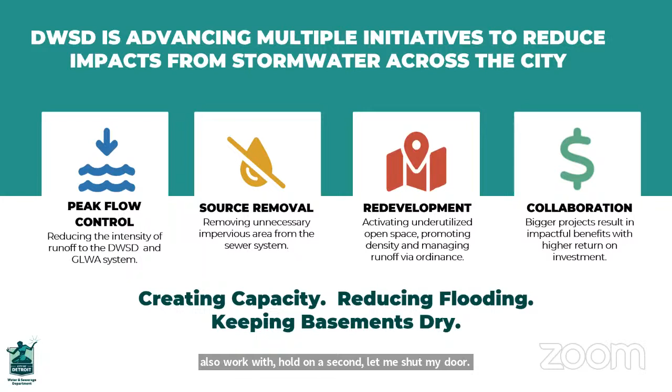We also work with—hold on a second, let me shut my door. My apologies. We work with redevelopment to make sure they manage the stormwater where it falls.

We also collaborate with other entities such as MDOT, Bedrock, and our surrounding communities to get the most bang for our buck on stormwater management.

So let me talk about stormwater regulations. Prior to 2018, we did not have any restrictions on development managing their stormwater, so they just let it flow right into our combined sewer system. Then we passed the ordinance, and now we have over 100 projects across the city that have to manage their stormwater, and that's over 600 acres of land.

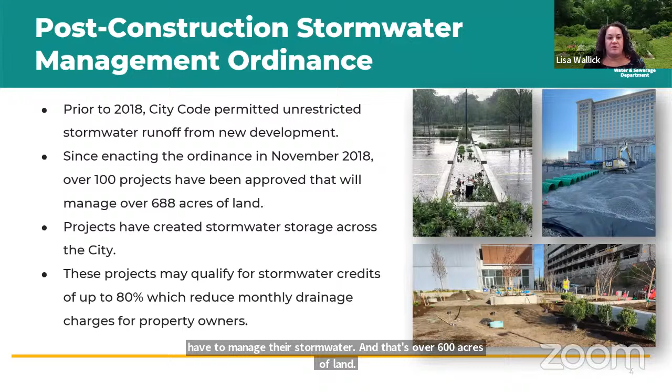These projects qualify for stormwater credit once they're installed. This says 104, but we know we have more than that. During a storm event, they hold back over 50 million gallons of stormwater, and at the same time these projects reduce, eliminate, or directly discharge over 2.8 million gallons to receiving waterways.

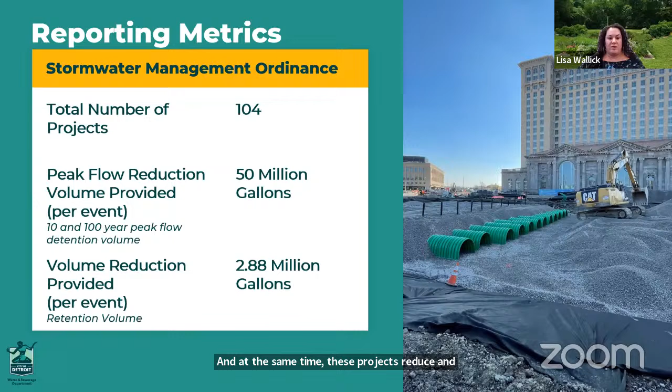We also have the municipal separate storm sewer system called an MS4 permit with EGLE. MS4 is where the catch basins are piped directly to receiving waterways, so they do not connect to the combined sewer system—they go directly to waterways, which requires us to comply with a permit in order to allow that to happen.

So we have to submit biennial reports to EGLE regarding our program status. We have to train our staff so they know what should or should not be going into that catch basin. We have to regularly inspect and clean the catch basins, which our M&R team does with us. We also have to do water discharge quality testing to make sure there's no E. coli, bacteria, or anything else coming into that pipe headed towards the water body, ensuring nobody illegally connected. So we have to do annual testing.

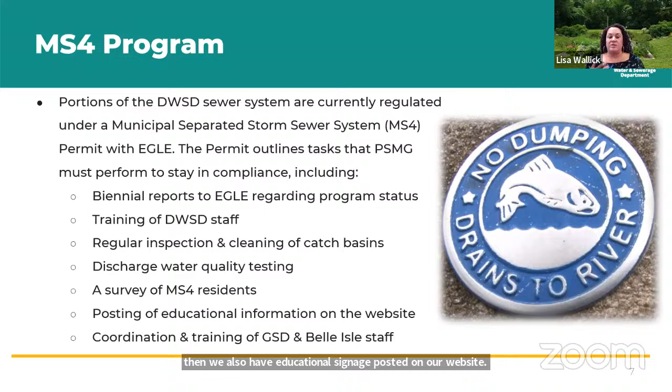We also have to work with residents within areas that have these catch basins, survey them, and let them know what they should and should not be doing near catch basins that directly discharge to receiving waterways. We also have educational signage posted on our website, and we train the GSD and Belle Isle staff, as most of our MS4 is either on Belle Isle or in parks.

So then we also have projects that DWSD completes. These are our own GSI projects. We have constructed 19 to date that manage stormwater, mostly in the Upper Rouge tributary area of the city, which is the northwest side of the city. They manage more than 53 million gallons of water annually, reducing peak flow going into the system, and they usually include native landscape to help beautify streets and parks.

Most of them are in parks and city public facilities. Now that we've gotten into bigger projects, we coordinate with our water and sewer engineering teams to ensure that when we go into a neighborhood we're assessing their water and sewer needs as well. We don't want to go in and put in a bunch of storm sewer to convey stormwater, and then 2 years later go in and rip up the neighborhood and put in a bunch of water mains. So we coordinate so that when we go into a neighborhood for a very large project, we make sure we're only disturbing it once.

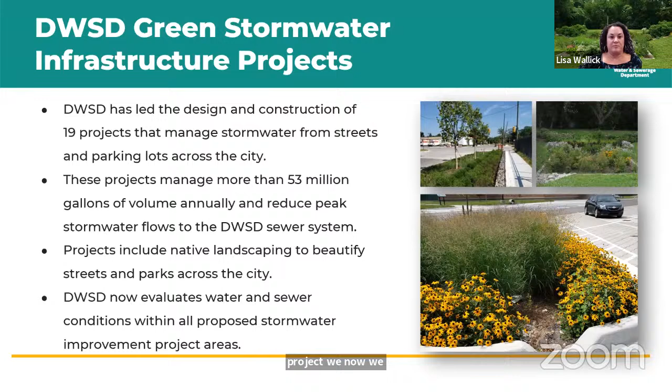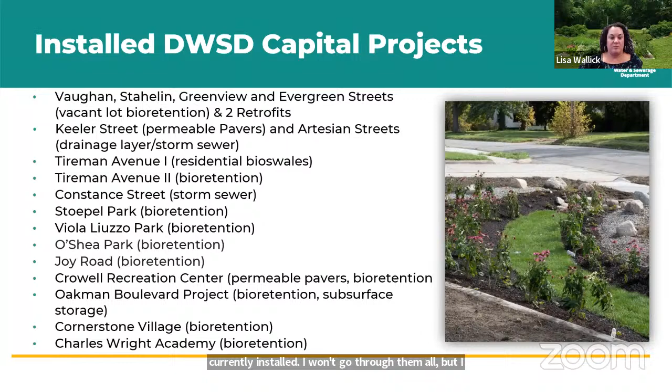So this is a list of those 19 projects currently installed. I won't go through them all, but I think they'll be in the presentation you receive. That's what's in the ground now. It cost $13.9 million to construct those 19 practices. They hold back 2.2 million gallons of stormwater per event, and they have a peak flow reduction annually of 53 million gallons.

So we do have some projects under construction that are not included in that list. Far West is our first, biggest project. That cost $32 million, and it was almost fully funded by the Evergreen Farmington capacity swap, where they needed to get water into the system and we were getting all this water out of it. So with coordination with GLWA and EGLE, we were able to do a capacity swap and have them fund this project, where we are managing stormwater runoff from over 200 acres. That's a 2.5 million gallon peak flow reduction, and this project removes over 100 million gallons from the system annually, really freeing up capacity in that combined sewer system.

In this case, we're in Rouge Park, which is going to be a beautiful amenity for the park to have this big piece of green infrastructure.

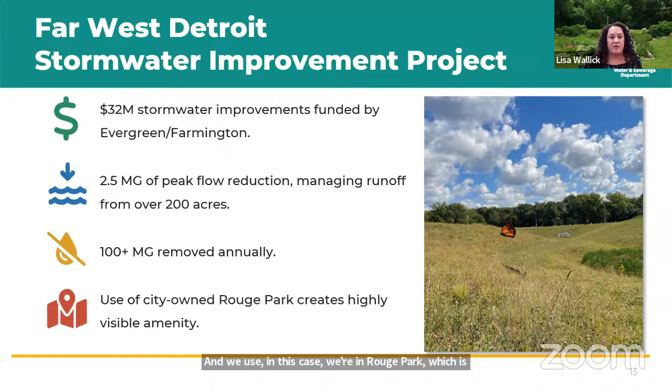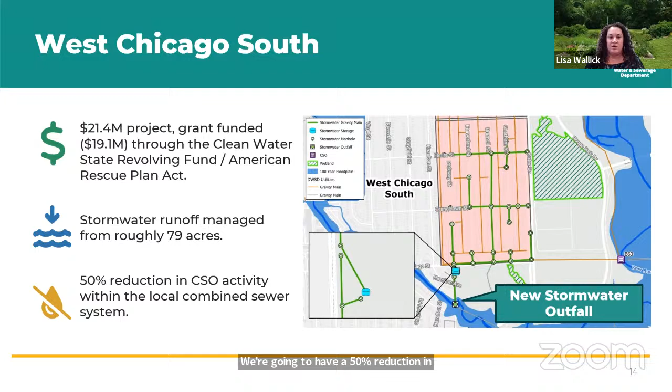A project that also just kicked off was West Chicago South, a $21.4 million project. We have grant funding in the amount of $19.1 million. We are going to manage runoff from 79 acres. We're going to put in a new stormwater outfall that discharges at the Ashcroft Drain, which will help improve water quality there, and we're going to have a 50% reduction in CSO activity as a result of this project.

So we're getting the stormwater out and also helping to meet regulatory requirements. Blackstone has also kicked off. This is where we're investing $1.4 million. We have $300,000 in grant funds for this project as well, and we're reducing the peak flow for 4.34 acres. We're going to remove over 500,000 gallons of stormwater annually from the system.

So here we are, it's the first time we're going to try removing a street. We're removing a portion of Blackstone between Keeler and Midland, and we're going to install over 200 trees to manage stormwater and create like a stormwater park there. So this will be our first time experiencing this, and it's exciting. The residents there are excited about that too.

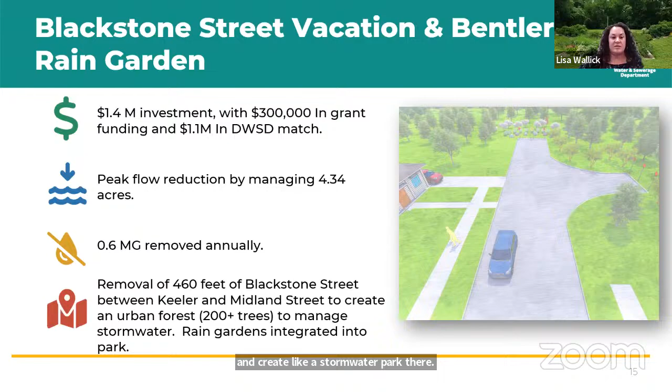We have projects in design. This project, the Detroit and Centerline Collaboration Project, just went out to bid. This is where we worked with GLWA, EGLE, and Centerline, as Centerline needed to get a small increment of flow into our system, and they were willing to fund a project for DWSD to do to get a lot of flow out of the system.

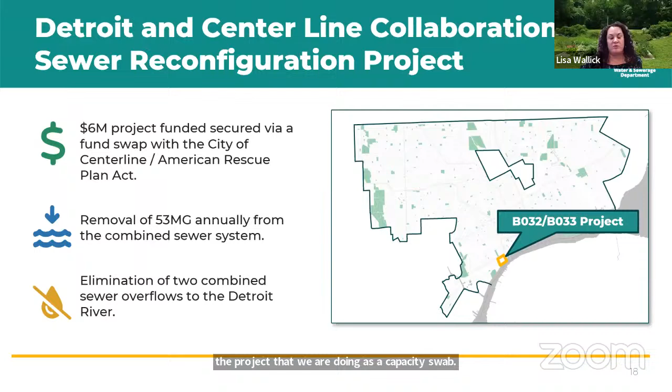So in this case, we received $6 million from the city of Centerline through their American Rescue ARPA dollars. We are going to remove 53 million gallons of stormwater annually from the combined sewer system through this project, which we are doing as a capacity swap. This will eliminate 2 combined sewer overflows from discharging in the future. The area is a 55-acre drainage area, and you can see at the bottom of the screen B32 and B33. Both of those will, in the future, discharge stormwater only and no longer be connected to the combined sewer system, so we're really creating capacity there and managing a lot of stormwater.

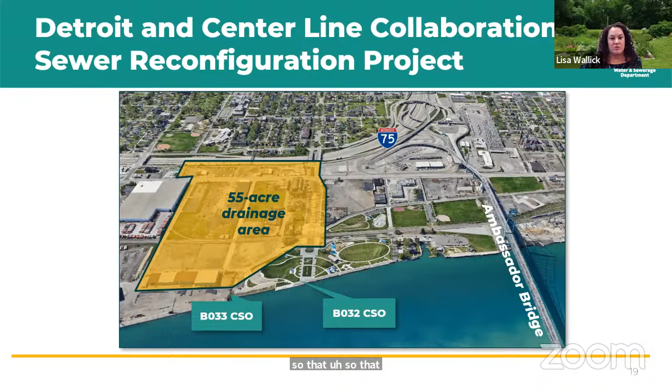We also have shovel-ready projects. We have over $60 million in planned stormwater management improvements for West Chicago and Schoolcraft. And we know there's a lot of funding out there, so we went ahead and moved forward with these projects through design.

They are to remove stormwater from the system and get it to the Rouge River. It's a combination of gray and green infrastructure to maximize performance. We are seeking funding through the state's Michigan Clean Water Revolving Fund, and anywhere else we can. We're looking for money, and if anybody has any, we'll take it.

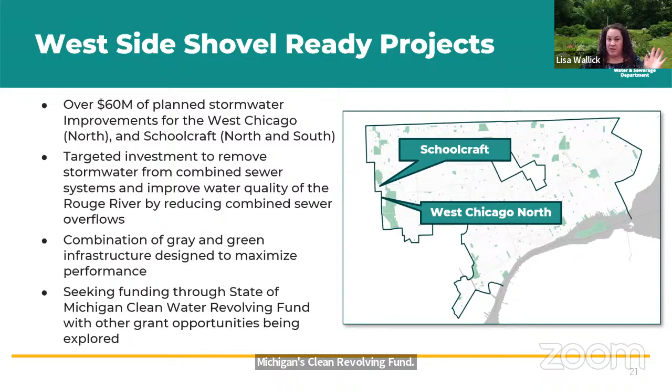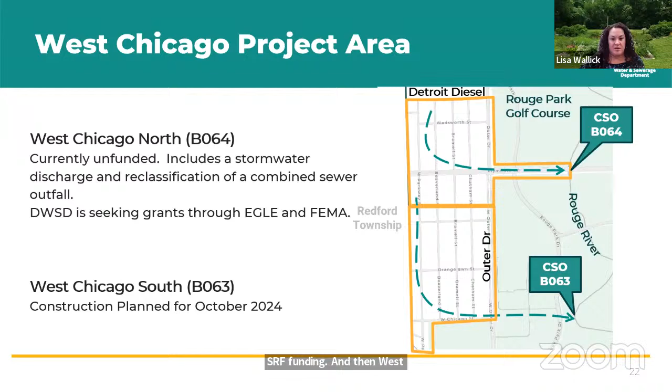Schoolcraft North is currently unfunded and we're seeking funds through EGLE and anything else that comes up that we think might work. Same with Schoolcraft South, which will also include a new stormwater discharge to the Rouge River.

The Fenkell stormwater projects are shovel ready and funded. We have $1.3 million in grant funds secured to install approximately 20 bioretention practices, and all the green dots on the map show the locations. These practices will manage stormwater runoff from roughly 50 acres and have a 9 million gallon peak flow reduction during a storm event.

These gave us a lot of information on groundwater table and infiltration. We're hoping that these all connect to a larger project that's in the works. So this was a great grant-funded initiative, and it'll help provide an amenity to hundreds of homes.

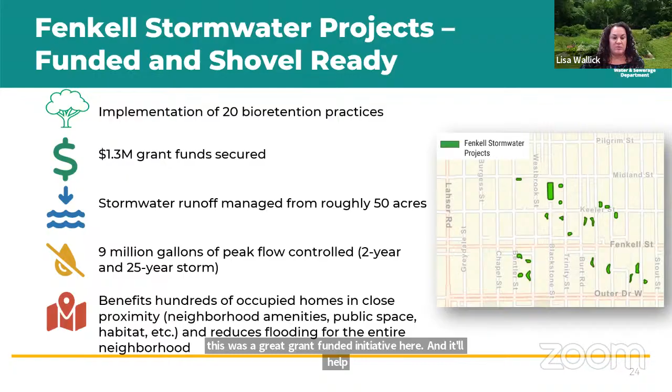So we have projects in planning. The East Side Stormwater Relief Study - this project is fully funded by grant dollars. We got creative: we received an EGLE grant for $480,000, and used a NFWF grant as the match money. So this project requires no ratepayer dollars.

What we're going to do is try and find a way to study the area - a study to see if we can get the stormwater from these 5 neighborhoods into a collection system and into possibly some sort of nature-based solution that could treat the stormwater and then pump it to Fox Creek, where we could improve the water quality in Fox Creek as an added benefit.

This area was chosen for the study as it has long lengths of storm sewer before it attaches to the combined sewer. So if we can catch those existing storm sewers and reroute them, that would be a great benefit to the east side.

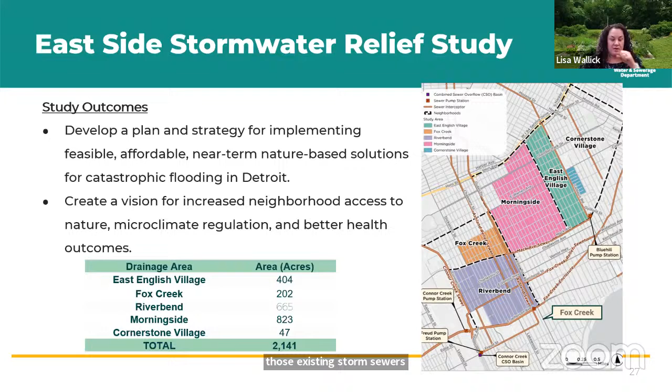The objectives are, same as most of our other projects: we want to keep basements dry, reduce street flooding. We don't want the risks associated with flooding in this area. We want to improve our infrastructure resiliency and be ready for climate change and the shift in weather patterns we're having. And Fox Creek could really use some improved water quality - that'd be a great addition if the study proves we can make that happen.

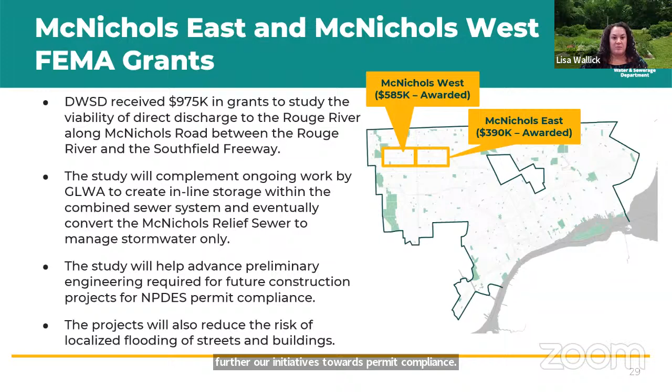McNichols East and McNichols West - we have almost $1 million in grant funding to study these 2 areas to see if we can get the stormwater out of the system and to the Rouge River. This study is also planned to complement work going on by GLWA, where they're trying to create or install inline storage. We also want to convert the McNichols relief sewer to stormwater only. All these things will be coordinated with GLWA as well to see how best we could get the stormwater in this area to the rivers, especially since this is a highly active CSO area. That will help further our initiatives towards permit compliance, and again, reduce the risk of flooding in the area to buildings, streets, homes, etc.

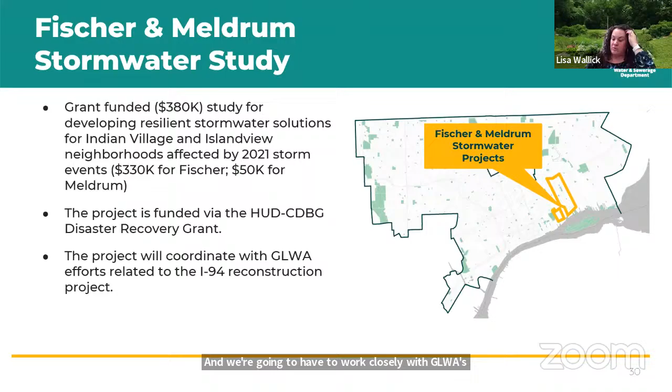Fischer Meldrum - we received grant funding from the HUD CDBG Disaster Recovery Grant. We are going to study the area of Indian Village and Islandview neighborhoods to see if we can find a way to convey the stormwater to the Detroit River. We'll have to work closely with GLWA's efforts in this area, as well as the I-94 reconstruction project. So in a nutshell, our projects in planning right now are shown in the lighter green across the screen, and then we have the darker projects - the darker green are those that are designed.

Three of them are actually funded, and the other two are awaiting funds. And then we have our construction projects that are ongoing.

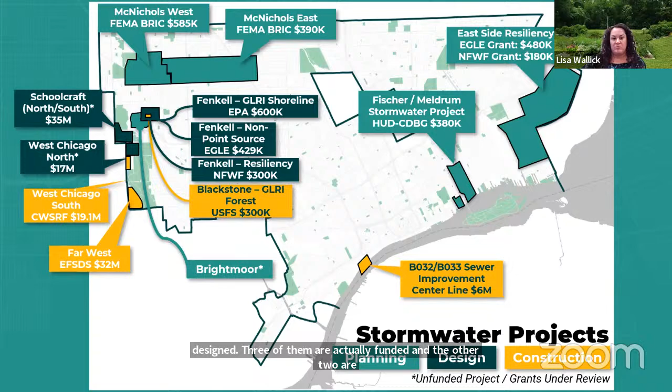So, stormwater collaboration. I talked earlier about how collaborating can lead to better stormwater management. With Gordie Howe, we worked closely with them, and we were able to have them convey all their stormwater to ponds on site that then discharge to the Detroit River. That was a $30 million investment by Gordie Howe.

We're working with the 375 team right now, and as they bring that freeway up to grade as a boulevard, they are going to install a stormwater-only discharge pipe for themselves, as well as one for DWSD. We're getting a 4-foot stormwater discharge pipe that will take the excess property's drainage that is going back to the city. We'll get the drainage from that and attach it to the 4-footer. That's over a $35 million investment by MDOT in that area.

Then you have the I-94 reconstruction, which is over $700 million invested in stormwater management, where they're going to put in a tunnel to get the water from the freeway to the Detroit River. M39 is currently under a study to see what the options are, and we're assisting with that as well to get the stormwater to the Rouge River.

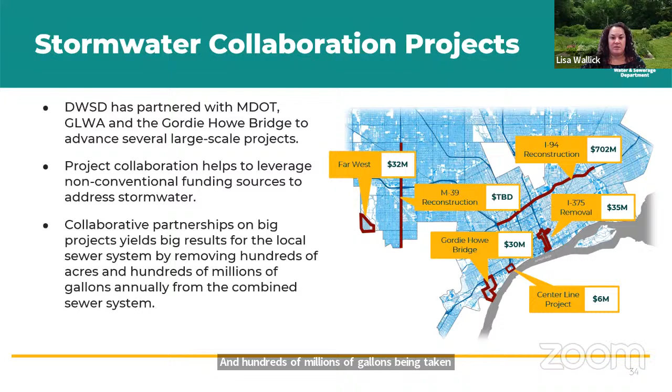So the collaboration with these other entities has led to hundreds of acres being managed and hundreds of millions of gallons being taken off the system. That really creates a lot of capacity in our combined system and helps us become more resilient.

The Stormwater Hub is a website we developed in collaboration with our nonprofit partners and other community groups to promote GSI. It's a website you can go to and interact with, click on resources, and even all the dots on the map tell you what it is, whether it's a rain barrel at somebody's house, a larger development project, or one of our projects, and how much water it manages, etc.

We've gotten compliments from other cities wanting to recreate this, so we've gotten a lot of positive feedback. It's a positive promotion of stormwater management that's owned by DWSD. Public Affairs, our stormwater team, and the IT team all keep the website up and running.

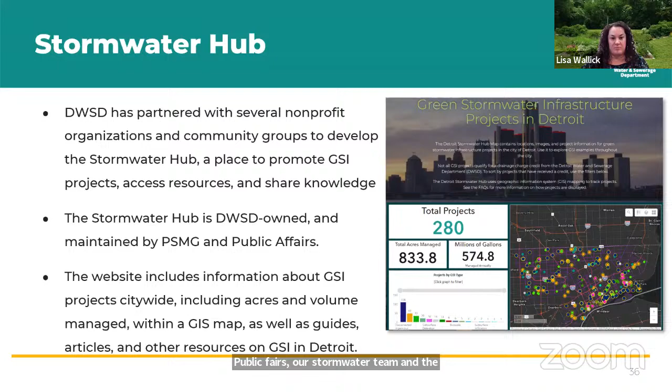The drainage program is where we incentivize owners of existing private property to manage their stormwater and retrofit their site, so they're helping too in this effort. As of the end of fiscal year 24, over 580 million gallons are managed annually through retention, putting it into the ground, or detention, holding it back during the storm. On top of that, there's over 380 million gallons being managed annually through direct discharge.

That's people sending their stormwater directly to the river. It's been highly successful in managing existing sites that didn't have stormwater management previously. In fiscal year 24, we did over 200 property assessments for drainage-related inquiries.

Permitting projects — we have a lot going on in permitting. Some items done in fiscal year 24: we worked with IT to define a business process and procure and install new permit software. That was a big effort. We're trying to upgrade our permitting software.

We held meetings between DWSD groups internally to facilitate timely and collaborative responses to customers, and we've been improving on that regularly. It's a great effort we do here in the permitting section. They also started digitizing historical infrastructure records and analyzing the gaps in the current DWSD GIS database.

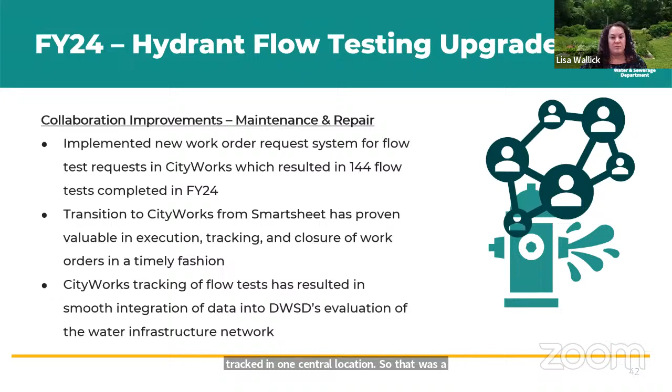We completed a lot of permit reviews and issued a lot of permits in fiscal year 24. BSEED permit reviews were up by 43% - we did 232 of those. We were down a little bit in how many water and sewer permits we reviewed from fiscal year 23, doing 442 of those. Demo clearance was up a little bit - we did 168 demo clearances. We issued 147 hydrant permits, and the sewer repair permit number is up by 27%.

I think that might be good news that people are using the permitting, obtaining permitting instead of illegally trying to correct their sewer issues. So that's good if they're coming to us now. It's progress.

We also train staff on submittals for compliance with the Clean Drinking Water Act 399 and Part 41 wastewater construction permits. EGLE approved 17 of our private development permits in fiscal year 24.

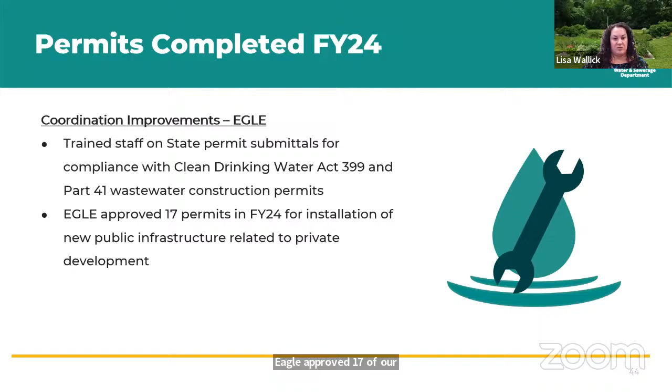Customer office hours - the team did a great initiative here. They developed virtual office hours, and we held over 100 virtual office hours with our customers and developers across the city. They're able to click on a link, pick a time, pick a category, and then we show up and meet with them to do whatever we can to aid the customer in obtaining green credits or creating developable plans so they don't have to resubmit all the time, or whatever we can do to assist them in getting what they're requesting done accurately the first time to the best of our ability.

We also collaborated with the mayor's infrastructure team, BSEED and DPW. All those offices know where our link is to office hours and direct customers to that regarding DWSD inquiries.

More improvements are underway. We're implementing a new interdepartmental notification via CityWorks so that our customer service reps are notified when the disconnection is complete. Before it was all manual and remembering to check - now this will be a notification that says the disconnect's complete, and you can issue the clearance or the invoice. We're also doing website updates, developing new permit-related standard details, evaluating permit fee schedules, and updating our inspection standard operating procedure.

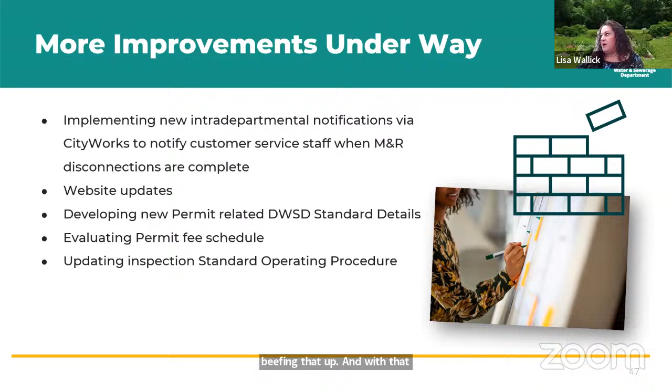We're beefing that up, and with that, I'll take any questions that anyone has. Any questions?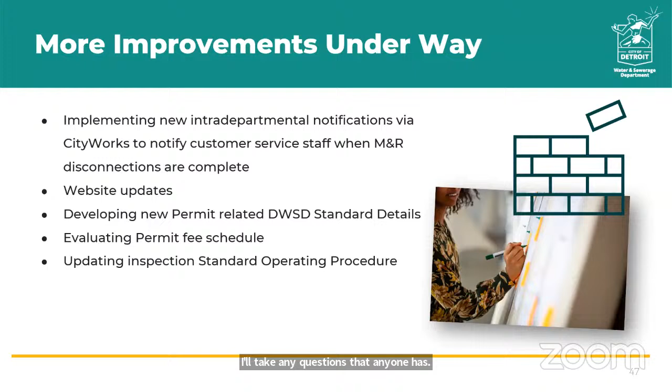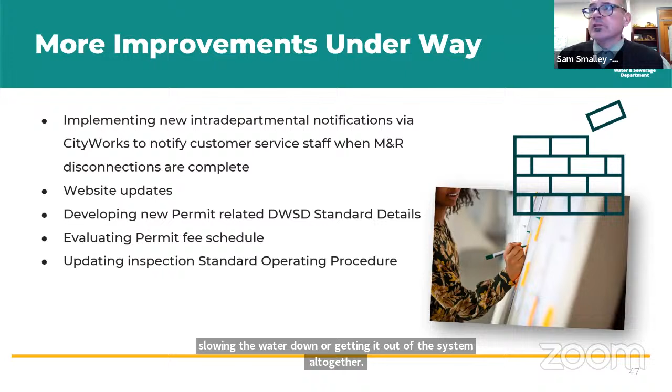Thank you. Appreciate that very much. Mr. Chair, I'd just like to emphasize that obviously that was a lot of information, but Lisa and her team have built an award-winning MS4 permit, and they're certainly on the front lines of making the entire city more resilient through slowing the water down or getting it out of the system altogether. So just wanted to emphasize that and thank her and her team for all their efforts. Thank you, Sam. Great, thank you.

Okay, next up, line item number 8 is our planning calendar. No changes, Mr. Chair. Thank you.

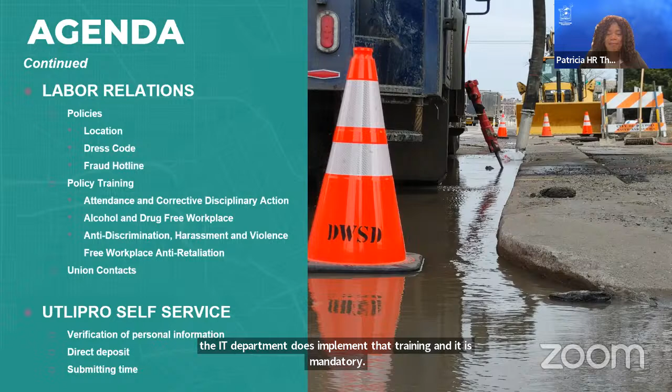Okay, and we covered this portion on the agenda in terms of some of the different nuances between the new employee orientation sessions.

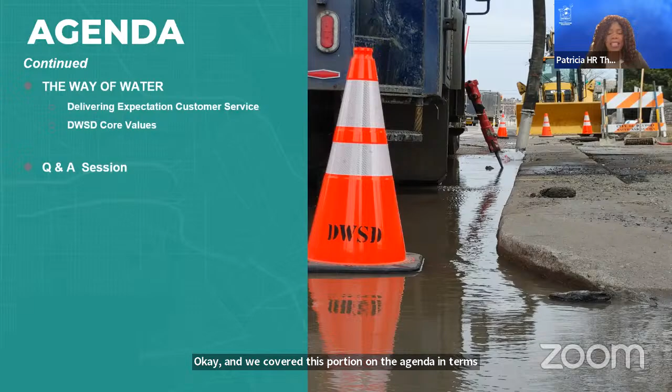And we'll have a new planning calendar next month for next year. If there aren't any questions, that concludes my report.